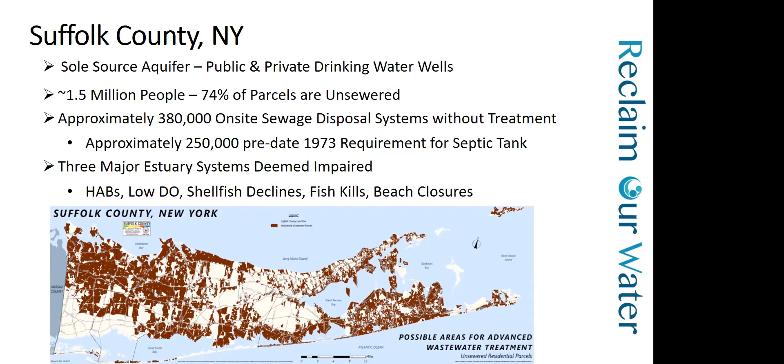All of the untreated wastewater gets into these water bodies and wreaks a lot of havoc. I'll go over some of the issues with too much nitrogen that's coming from many sources, including these on-site wastewater disposal systems, and what that means to our water bodies.

Some of the water quality impacts that occur when we have too much nitrogen in our water bodies results in harmful algal blooms. Nitrogen is like a fertilizer - it feeds plants and makes them grow. In our water bodies, what kind of plants do we often have? Microscopic plants called algae. One of the major impacts we see when there's too much nitrogen in a water body, whether marine like the bay or freshwater like a lake, is harmful algal blooms.

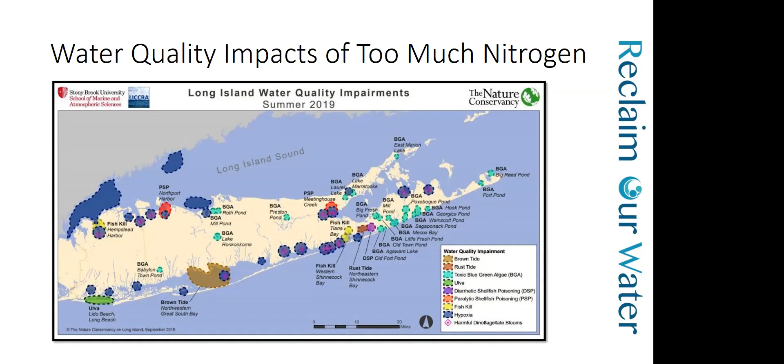Inland we see these spots of green, which is toxic blue-green algae. This not only turns the pond bright green or blue-green, it's actually toxic, and we've had dogs die after swimming in these water bodies. Very unfortunate consequences, and it's all tied back to nitrogen.

So where does all this nitrogen come from? Well, based on the information we received from the Subwatersheds Wastewater Plan, nitrogen discharge from on-site wastewater sources represents the single greatest factor that can be managed to restore and protect our waters from the impacts of nutrient enrichment related water quality degradation.

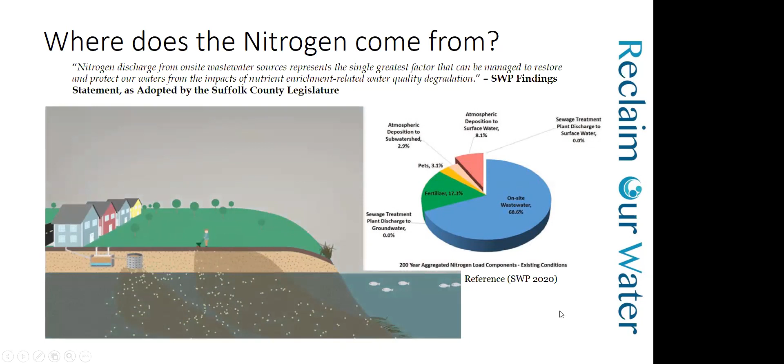Although they were banned from new construction - if you're building a new house, you can't put a new cesspool in - since 1973, that was quite a long time ago, cesspools are still around. Cesspools are little more than holes in the ground that discharge raw, untreated human waste and can contaminate surface and groundwater. We know that they are contaminating it.

However, in 2019, a loophole was closed where homeowners can no longer replace an existing cesspool with another cesspool. They would need to at least come up to the current conventional septic system at a minimum.

And so what do I mean by a conventional septic system? That means there's a septic tank before the leaching structure that holds solids and can be pumped out from time to time. There's approximately 110,000 of these in Suffolk County, and this was the standard as of 1973 - no new technology about a septic tank.

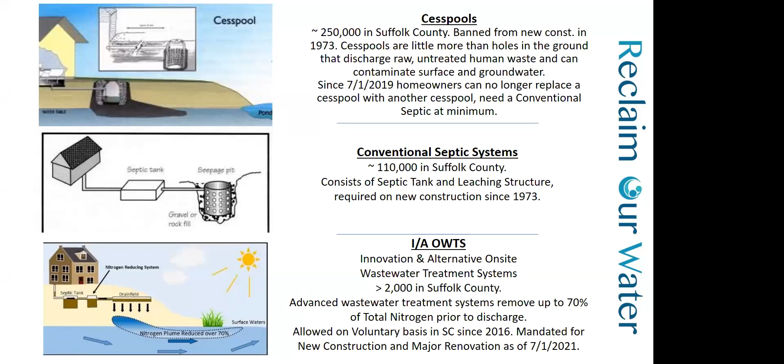I'll reiterate some of these IAs and tell you some of the names here. HydroAction and FujiClean are currently in our general use approval phase, and the SeptiTech STAAR, the Norweco Hydrokinetic, Orenco Advantex, and Norweco Singulair are in the provisional use approval phase, and they all are currently removing nitrogen and are approved for use. They all have different shapes, sizes, lids, compartments and pipes, but essentially they all do the same thing - they allow nitrogen to go through the nitrogen cycle to reduce the nitrogen in your wastewater and release it as N2 gas into the atmosphere. N2 gas is an inert gas that's currently 78% of our atmosphere.

So there are several different types, but really the health department is the one making sure they all work, so you know which one to go with. A lot of times homeowners ask us which one should I use, and we do recommend you work with your design professional who's going to help design what sanitary system to use, which size, how much leaching you need based on the size of your home, as well as your selected installer of the system. They may have some recommendations of which one would be best suited for your site.

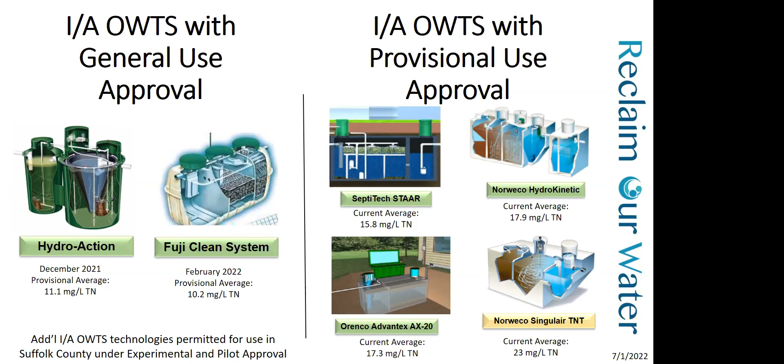Do you have high groundwater? I know a lot of us do, especially the neighborhood around Cannon Lake. High groundwater is an issue there, and certain systems may be better suited for that. This is where the wastewater gets treated, and then it gets released into the leaching system. This is what's important for those sites with high groundwater, especially around Cannon Lake. So an IA system treats wastewater.

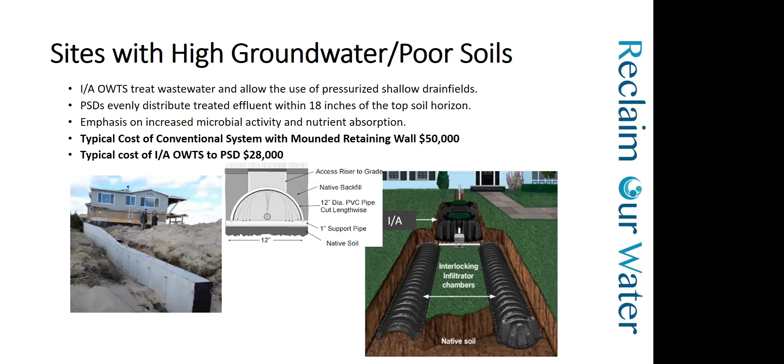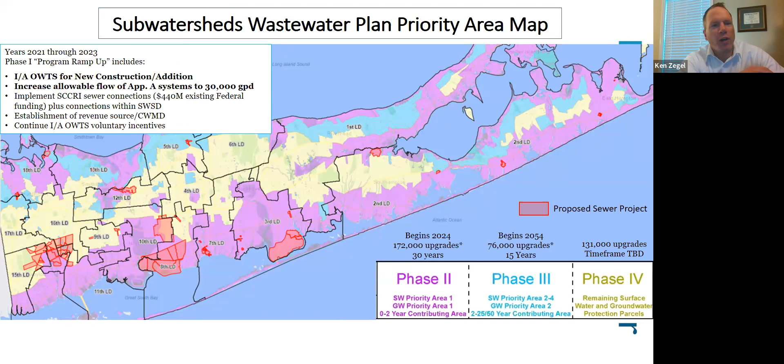Thank you, Julia. Good evening, everyone. So, as Peter mentioned before, the Subwatershed's Wastewater Plan was 4 years in the making, and essentially establishes our roadmap for when, where, and how to implement wastewater upgrades for these 380,000 systems, by creating priority areas where we want to attack the most vulnerable areas to nitrogen loading first.

So this graphic on the screen right now, the areas in purple show those highest priority areas. Couple other things that I want to mention just regarding innovative alternative systems and some of the findings from the Subwatershed's Wastewater Plan.

Another finding from the Subwatershed's Wastewater Plan was that for Suffolk County, sewering is an important component, but for the most part, in most locations, these innovative alternative systems are much more cost effective, upwards potentially of 2 to 3 times lower cost than sewering, which was an important finding. Also, these systems remove other contaminants from the wastewater, such as emerging contaminants.

You hear that word a lot in the news today. There's still research being done on that, but we do know that these systems help reduce those contaminants. And the last thing is that the term innovative alternative sounds like it's brand new, but this technology has been tested in Suffolk County, but also tested for over a decade and used for over a decade in other jurisdictions.

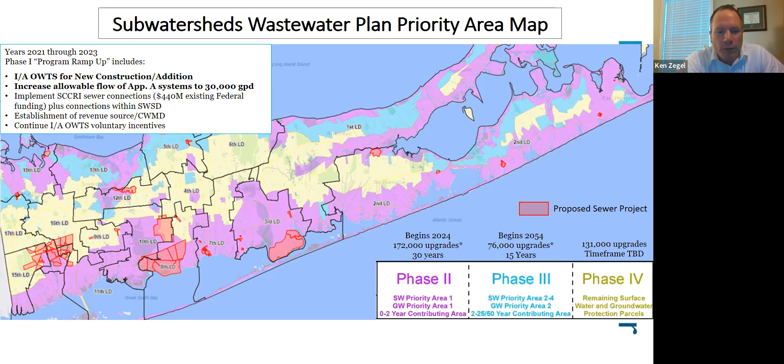Real quick, this is, I think, the last slide for me. I just wanted to mention that one of the things this plan did was break the county down into 190 individual water bodies and determine what their watersheds were, where the groundwater was contributing to these water bodies, how much nitrogen should be removed from the environment to restore the water body to acceptable water quality, establish priority ranks, as I mentioned before, and establish where the nitrogen is coming from.

So I just wanted to share this output from the study for Canaan Lake, which is part of the Patchogue River system, as many of you know. In Canaan Lake alone, there's over 6,000 homes contributing nitrogen to the groundwater in Canaan Lake. That's over 18,000 pounds of nitrogen a year going to the lake from wastewater.

That's a lot. Over 77% of the nitrogen for this particular water body comes from on-site disposal systems. So a significant amount of the nitrogen - and for the Patchogue River system, I think it's over 180,000 pounds per year of nitrogen. And as Julia mentioned before, think about it as fertilizer. A recommended load reduction goal for this area for nitrogen is 93%, and that's why this program and these grants and implementing these technologies is so important.

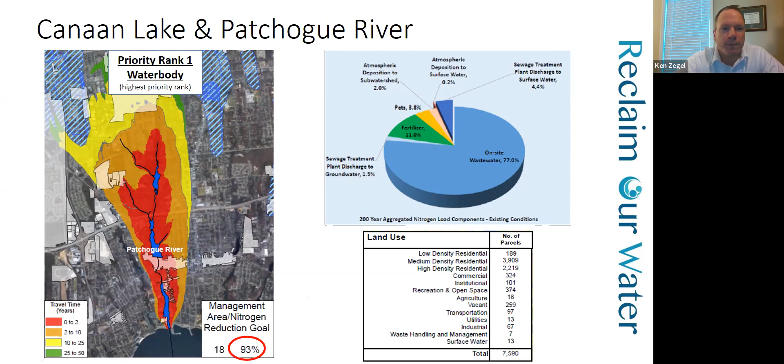And so we are making headway, as I mentioned. We have over 2,000 of these IA systems installed in Suffolk County so far. In Patchogue specifically, so the 11772 zip code, we currently have 26 IAs installed, and those are just replacements of existing systems that went through this grant program. 4 so far this year, and so we are likely to see that number double.

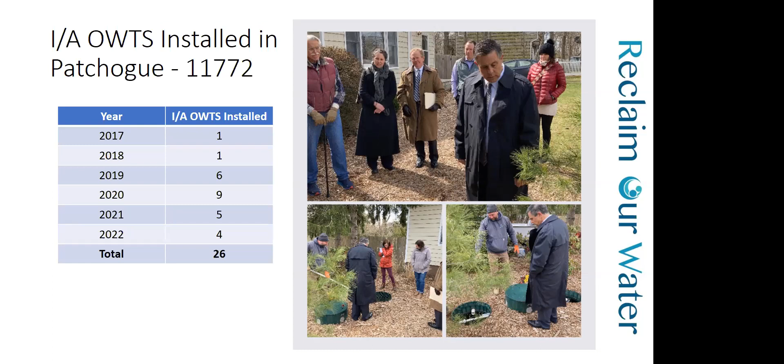Over 300,000 systems in Suffolk County still need to be upgraded in order for us to restore and protect our water bodies. The goal right now is replacing home sanitary systems in existing homes, providing financial funding to make it easier and incentivize this. It can be costly, as I mentioned before. That $28,000 price tag is not an easy one that we're ready to just take out of savings or borrow in order to replace our sanitary system.

So hence the Septic Improvement Program. It's administered by the Suffolk County Department of Health Services here in Yaphank. We have a website specific for this program, www.reclaimourwater.info, and from there you can also go to the Septic Improvement Program page specifically. I'll have this information again at the end, but we do have a direct phone number and an email address. The email is septicdemo@suffolkcountyny.gov, and the phone number is 631-852-5811. So let's get into the details about the Septic Improvement Program to fund the IA installation at your home.

We administer two different grants here at the Health Department. A Suffolk County grant, referenced as the SIP or Septic Improvement Program. That's a $10,000 base grant with additional $5,000 options if a pressurized shallow drain field leaching system is necessary, and/or if the homeowner qualifies as low to moderate income. An additional $5,000 towards installation cost is available to LMI applicants, based on federal HUD guidelines. There's also a pilot program for an additional $5,000 to cover the cost of design services, since you'll be working with a design professional to design your sanitary system.

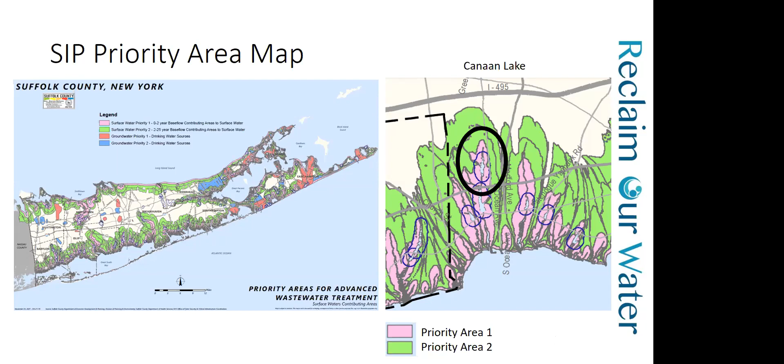Another part of the scoring system is based on the condition of the existing system. Systems that are in failure receive higher scores as well—for example, a catastrophic failure. This is not something anyone would ever hope for, but we do see it all the time. Caved-in sanitary systems like this one, made of bricks and blocks, caved in—that's an example of a catastrophic failure. Block cesspools that haven't yet caved in are also considered a failure. Here are some pictures of cesspools submitted to our office, and these are very common. As I mentioned, 250,000 of these block cesspools are found throughout Suffolk County, especially in communities developed prior to 1973.

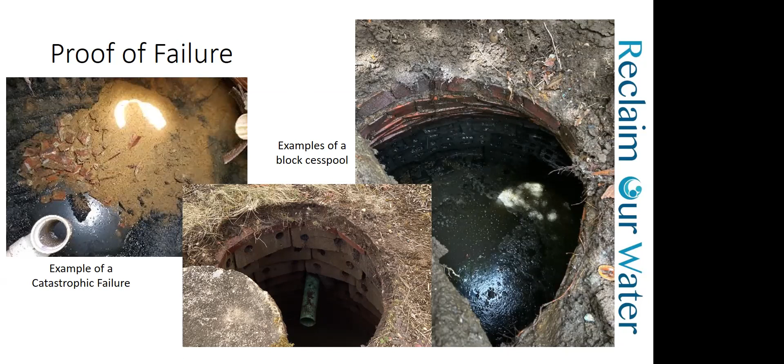SIP grant applications are scored as they come in. If the parcel has a catastrophic failure, it automatically receives a score of 100. If the project is considered a failure but not catastrophic, it receives a score of 90, based on the documentation submitted. The scoring continues from there with 80, 70, and 60 based on priority area. Catastrophic failures are expedited and issued immediately upon complete application submission. Non-catastrophic failures, scoring 90, are issued weekly based on the date of their complete application. For all non-failures, they're issued in priority order, also weekly, based on the date of complete application after all higher scores are issued grants.

So I have a lot of information on this. However, it's right from our website. I'm just going to read through it because there is some information you may need to know before applying.

The county SIP grant is not designed as a reimbursement program. Applicants must receive a grant prior to installation of an IA system. That is because grant awardees must select their installer from our approved list. On our website, we have a list of all the installers approved to install these systems.

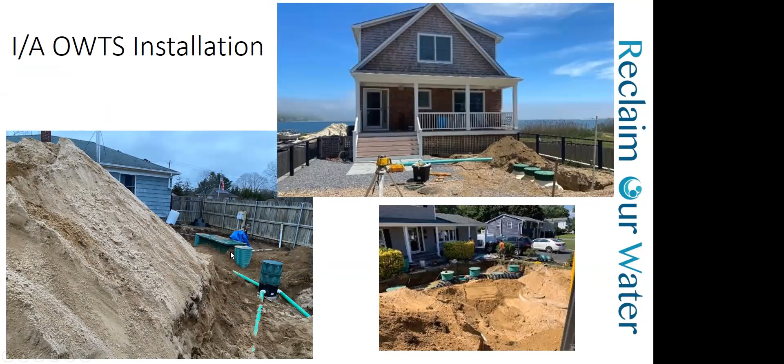The IA system is different from a conventional septic system in one major way - you need to be able to access it from ground level. You can see those lids, the green lids on some of these IA systems, at ground level so that your operations and maintenance provider, your O&M provider, can go in and service the system.

Also, not too frequently, but sometimes the health department will ask for permission to go to your site and test it to make sure that technology is still working as it's supposed to. Here are some pictures post-installation where those lids are still accessible but may be hidden into the landscape, like in a garden area.

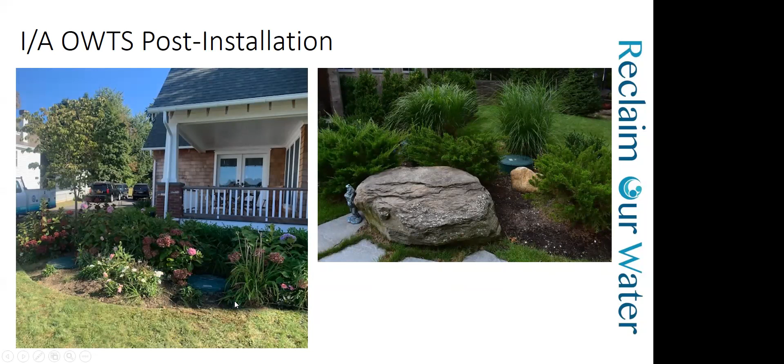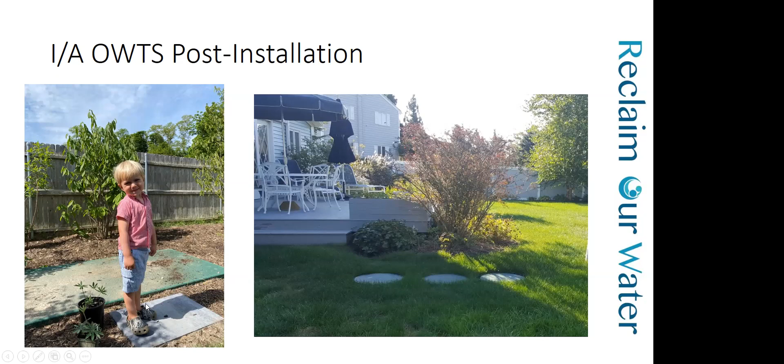We also have some pictures where the system is right into the lawn or another landscape bed. These are safe to be walked on and mowed over - they are sturdy covers.

There are other components too, control panels and air vents, because these have electrical components. These air vents and control panels can be tucked into the landscape as well, or just put somewhere on your property that doesn't irritate you, but it does need to be accessible as well.

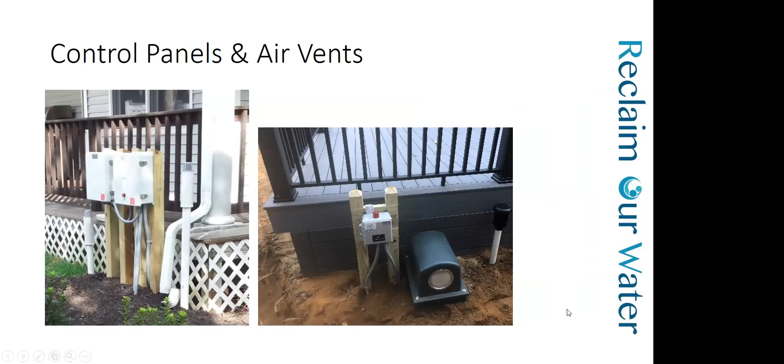We do have a lot more information on our Reclaim Our Water website, that's reclaimourwater.info, and that's also where you apply online for this grant. You could request a paper application, but we do encourage you to go online since there's a lot of information there. When you go to this website, there's a blue button at the top of the screen that says sign up now for the Septic Improvement Program.

So I will open it up for questions and comments. That's the end of my slide presentation.